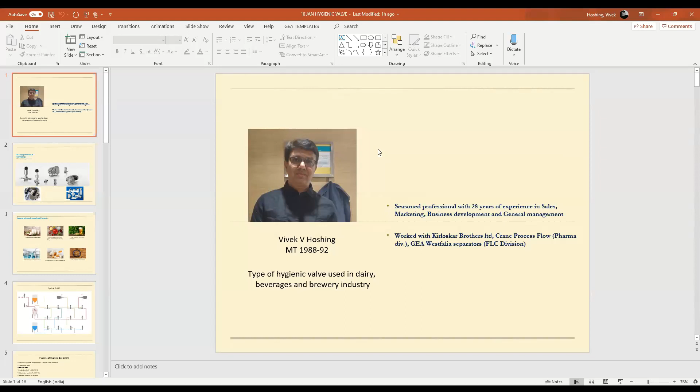This is me, Vivek Hoshing, passed out in 1992 from MIT, and after that worked mostly in marketing, business development, and general management. Worked with different companies like Kirloskar Brothers Limited for centrifugal pumps, Crane Process Flow Pharma division for their diaphragm valves as a business development manager, and now working in GEA Westfalia Separators for their FLC division. In India, I started the business for this FLC division in 2012, and since then we are doing quite good in this field.

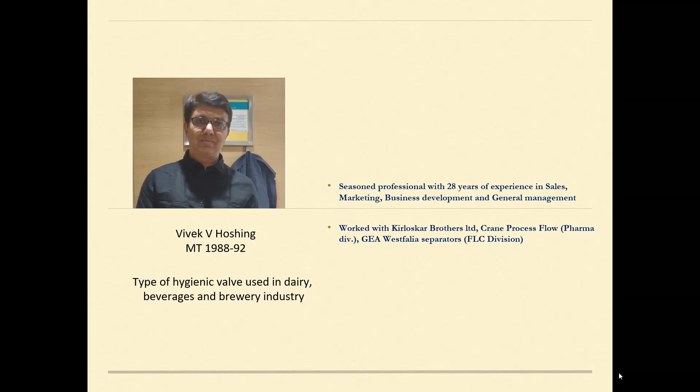So generally there are three things: one is valves, cleaners and pumps, then you have pipes, and then you have different fittings, which make up the whole system to facilitate the process.

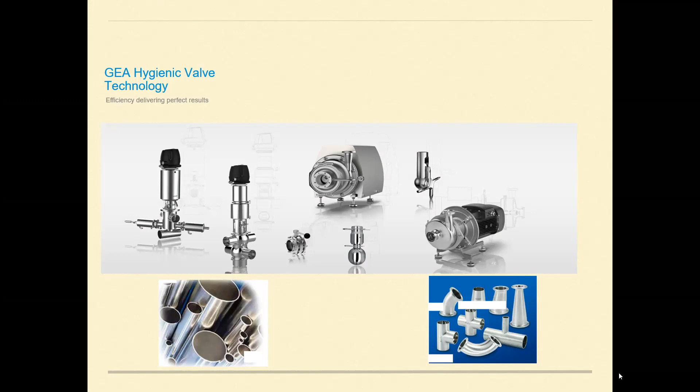Our hygienic valve technology finds its use in dairy for milk, yogurt, cheese, milk and milk products, food like sauces and pastes, baby foods, powders, and the best of all, our valves and other equipment are used in production of beer also, which I like the most. And then biotechnology, pharmaceuticals, home care and personal care products like shampoo, lotions, toothpaste, and production of animal foods.

Here the thing is that we require a process where cleanliness is very important - when you finish one batch of production and start another batch, before that the entire process pipeline should be very clean.

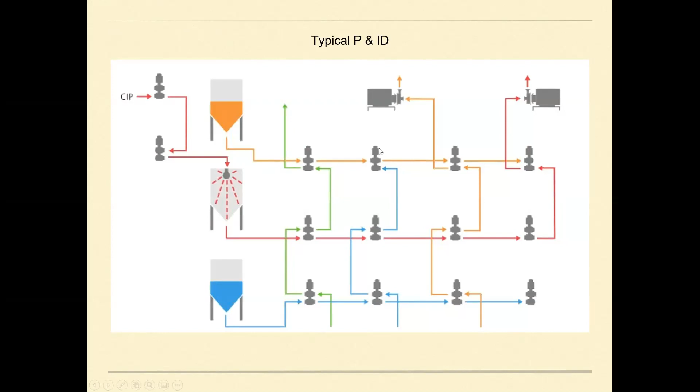This is the general P&ID where the actual work starts at the engineering centers. They make a P&ID for what all products are going to be made, and based on this, we come at the place where we select the valves and tell them which valve is going to work at what place.

The very basic requirement of hygienic equipment, whether it is valves, pumps, or fittings, is European Hygienic Engineering & Design Group approval, which is EHEDG approval. This tells that your equipment should be as easy to clean as a piece of pipe. They have their own tests that they carry out in your facilities, and then they give you the approval for EHEDG. So they generally conduct EHEDG tests.

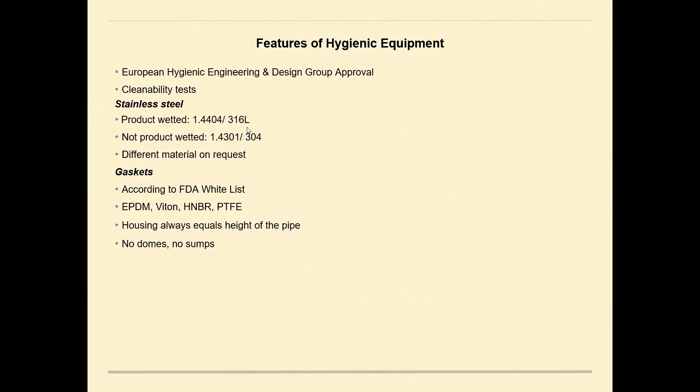So what happens is that the customer sources his equipment - pumps from company A, valves from company B, pipes from company C, and fittings from company D. So he has to specify which dimensional standard he wants to refer to and use in his plant, so that every component coming from different sources matches with each other, and there is no problem to weld or join them together.

90% of Indians go for 3A inch size or BS 4825, whereas in European countries they go for DIN 11850. I have not seen any case of IPS as of now.

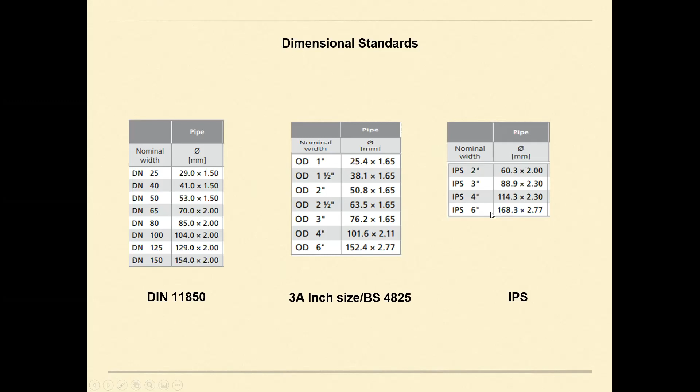So we have different types of valves. This is single seat valves, which are basically for isolation purpose. Then we have mix proof valves, which facilitate the handling of more than one product simultaneously. And these are tank bottom valves - in the tank these are flush mounted, so there is no stagnancy in the pipeline.

So these black things are control modules, which send the signal and operate the valve. This control module has got proximity switches, and it has got solenoid valves, which operate the valve.

So these are actuators - air and spring actuators. Generally the valves are closed or opened with the help of spring, and if the valve is in off position, you supply air, then the valve actuates and goes to the other position - like if it is closed, then it will open. So these are air versus spring actuators.

These are lanterns. Because many times we have to clean the pipe with hot water, if hot media is there, we generally keep a distance for the actuator, so that the heat is dissipated before it reaches the actuators, for their longer life.

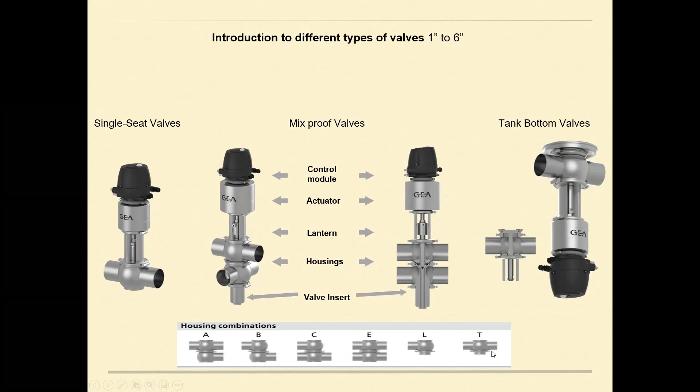Then we have housings, and these are valve inserts - so when any leakage is there, it comes down from here. Based on the customer's requirement of his routing, there are so many different types of housings available, like A, B, C, E that you are seeing. So based on the customer's process and instrumentation diagram, we select these valves.

So this is how they look internally. You can see generally you will find the valves, they are generally isolating the lines in line, but here the isolation is being done in steps. Let's say there is a product flowing in the lower one, and it keeps going. When the product is required to be sent to the upper line also, the valve is actuated, and all the 4 ports are connected. So this is just an example of 2 different types of bodies.

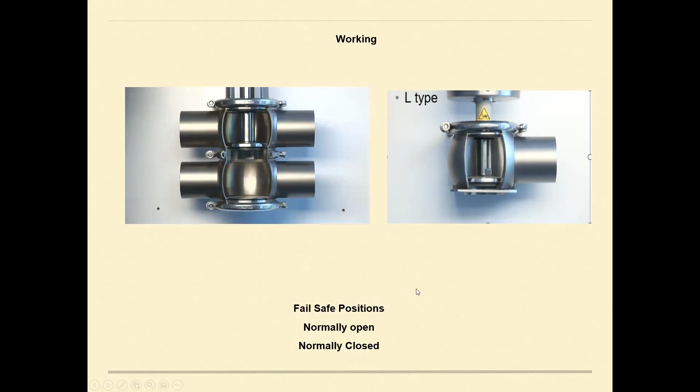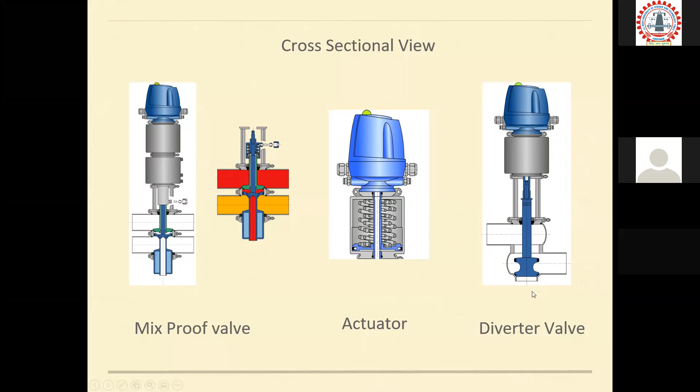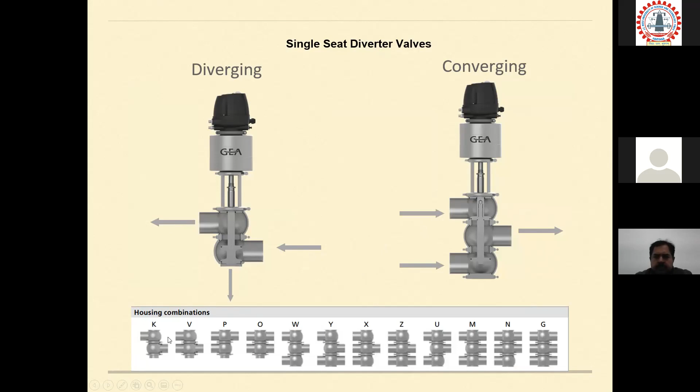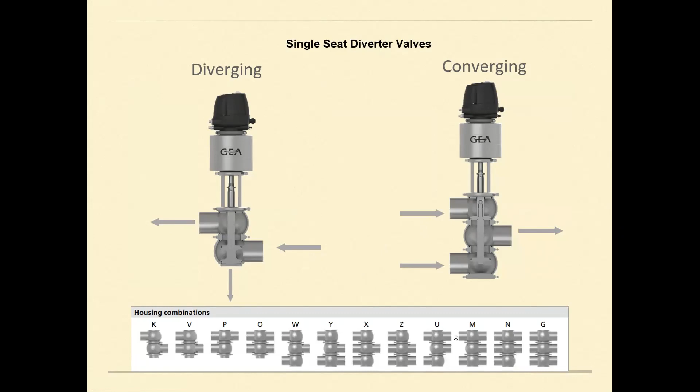Let me see if this is working. Can you see? No video is coming? Okay, now? Yes, now it is okay.

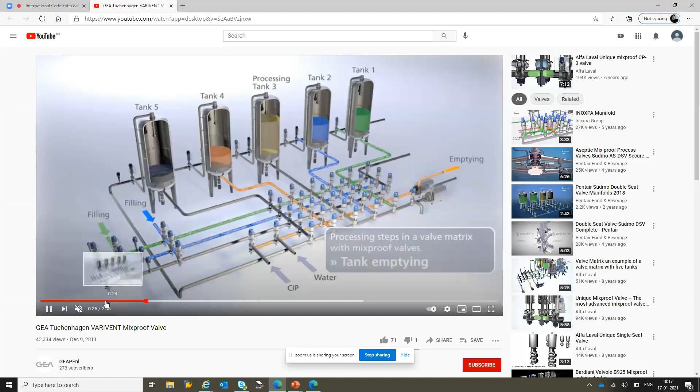So you can see that there are, this is how we call this a valve matrix. Different types of valves are put there. On the tank, one tank, there is a cleaning going on.

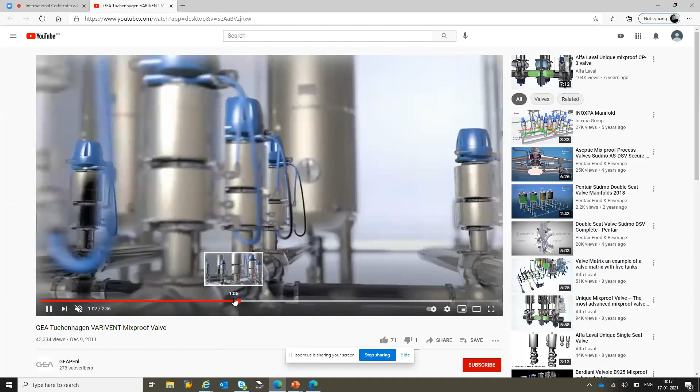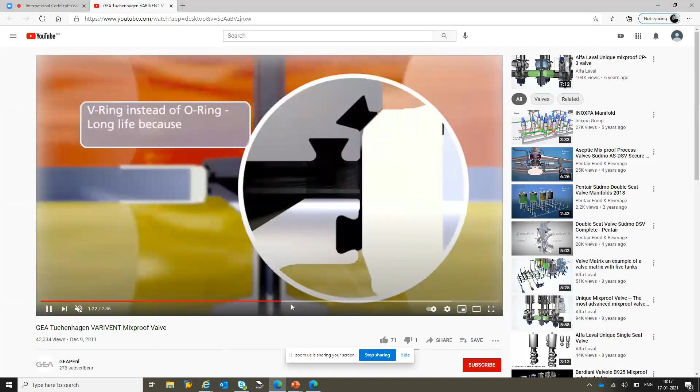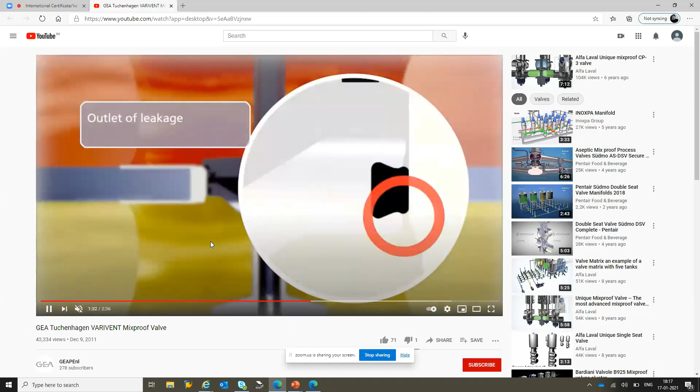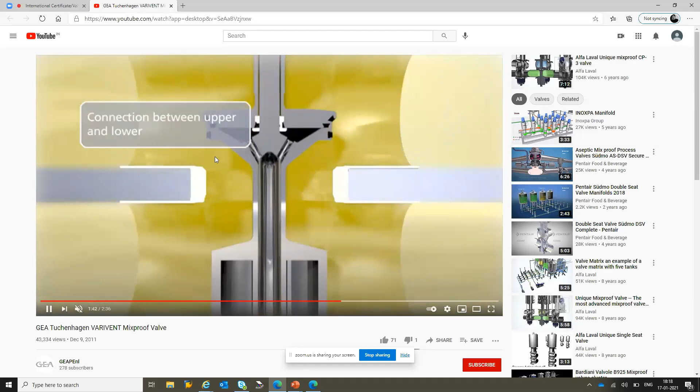I'll just fast forward it. So this is the mix-proof valve which we were talking about 2 minutes back, and two different types of media liquid products are going. If at all some seal gets leaked at one place, it should not mix with the other one. Otherwise the entire batch will be rejected, contaminated. So this is how it happens. And if you open the valve, the total 4 compartments get connected. Yes, so this is how it is.

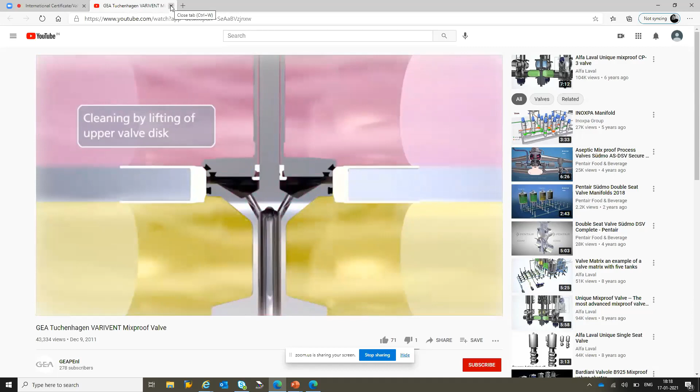So probably we'll go to the next slide. Okay. Can you see the slide? Yes, okay. So these were about the valves.

Now in any process you require to have some measuring instruments like pressure gauge, temperature transmitter. And the idea is that you have to put it in the line in such a way that the entire line has to be cleaned. There should be no trace of the old product which can lead to contamination.

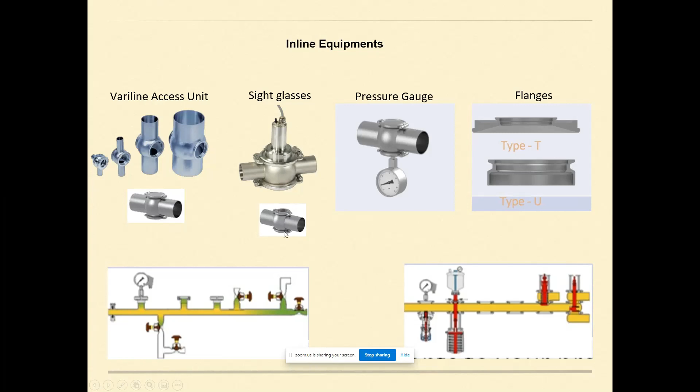So after this, the cleaning has to be done for the equipment. There are tanks; any dairy or anything is full of tanks. So when we clean anything, we need time, we need temperature of the cleaning solution, whether it is chemical or mechanical action, like we have to mechanically scrape it or something. So the idea is we have to use less time.

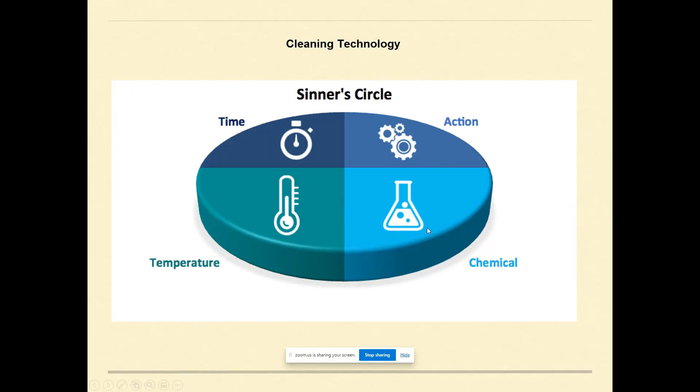If we provide more action, the time needed will be less, temperature required will be less, and we will have effective cleaning with less chemicals. So we provide 3 types of cleaners: rotating cleaners, orbital jet cleaners, and stationary cleaners, depending on the product which we have to clean. If it is simple milk, normally a stationary cleaner will help. But if it is a big tank like 10 meters or something, we may need a rotating cleaner or jet cleaner.

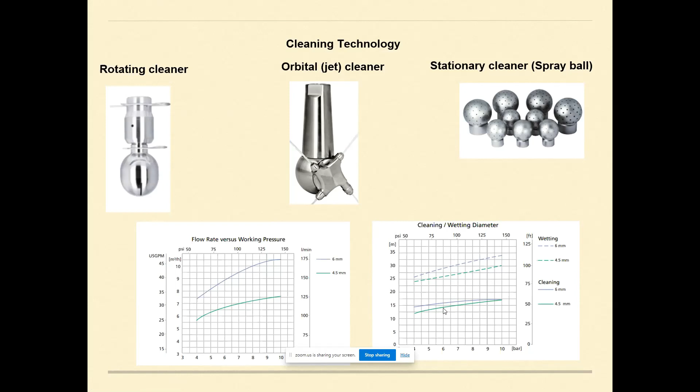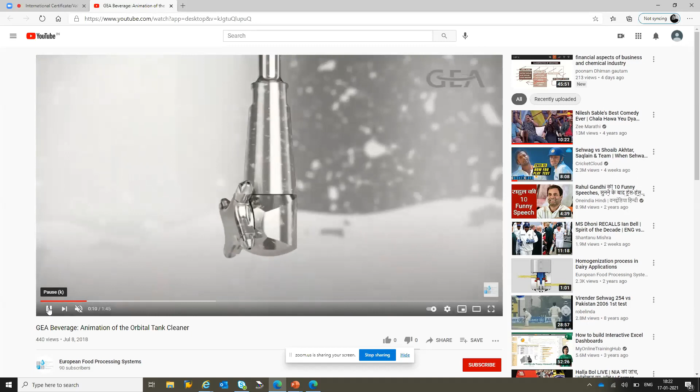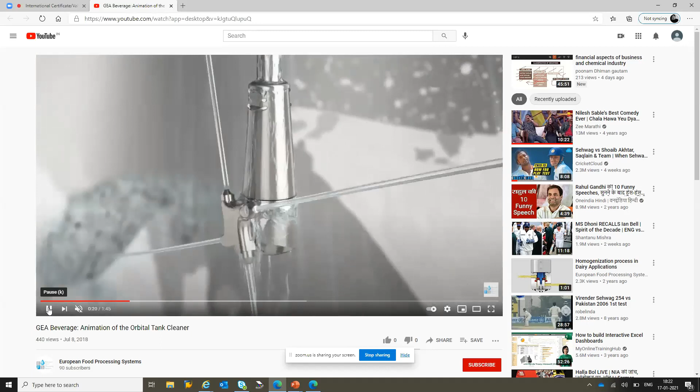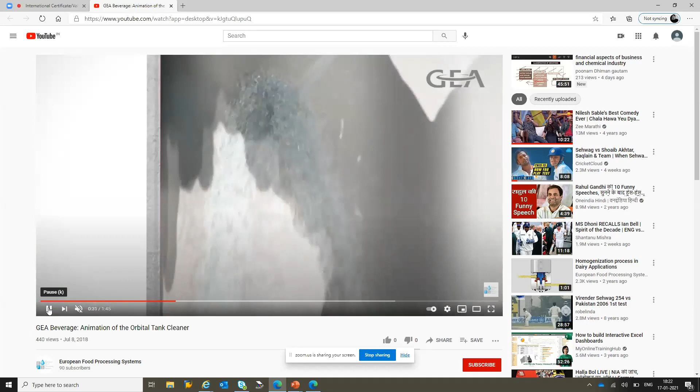So this is a typical silo, and you have a cleaner installed inside. You just have to give water at specified pressure, and then the jet starts rotating both on horizontal and vertical axis and cleans the entire tank in entirety. So generally first they will pass some weak acid and then rinsing liquid like water, and it is able to withstand that. So this is how.

Vivek, can I ask a question right here? Is there any connectivity with the viscosity of the fluid which has already been passed for cleaning? Because there could be different fluids which are passing.

Yeah, I'll give you an example. The easiest liquid could be milk, raw milk, and a very tough liquid could be toothpaste. So based on that, sometimes even the diameter of every tank differs - generally for paste it will not be 10 meters, it will be generally 1 meter or 1.5 meters. But still we have to use the orbital cleaner, which is a jet cleaner. So based on the application dimension, we have to choose the optimum solution, sir.

Okay. So you take the design consideration based on the viscosity of the fluid which is getting passed through the tanks? Yes, sir. And generally we have experience for certain cases, so based on that also. But yes, of course, both things have to be taken into consideration: the tank dimension and what is the product there.

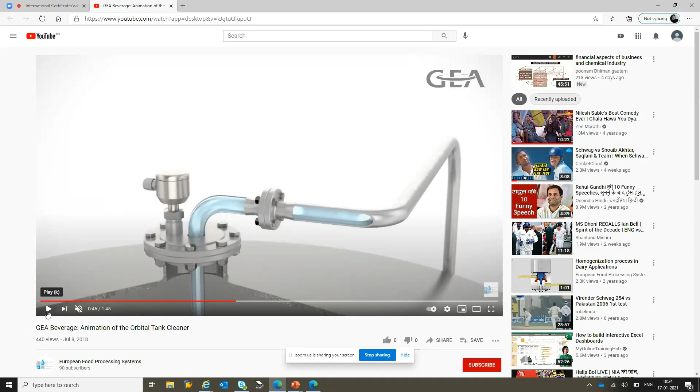Vivek, it's about cleaning of the tank - how do you clean the pipes? In the pipes, it is generally by flowing different kinds of liquids. First you have to pass mild acid, then water, and then you take a swab at the end of the tubes - generally that is called CIP, clean in place. So whatever CIP liquids you pass through the pipeline, it cleans the intermediate equipment also. So generally it is by rinsing.

So do you have a methodology to say what cleanliness levels have been achieved? Some test which can tell that you've reached so much ppm levels of cleanliness, now you can change over to another product? Generally, sir, they will take a swab, and if they don't find any product particle there, they approve the changeover then, yes sir.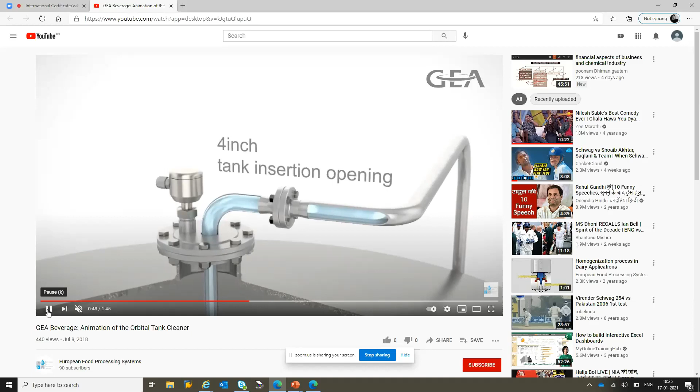So this is how it is, and then probably because the tank is closed, right? There are chances that we have given it pressure from the inlet, water from the inlet, and whether it is rotating or not rotating, we never know. So there is a sensor - you can see this sensor is there. It has to be hit by the water jet after a certain point of time, and it will keep giving signals to the control unit that yes, it is working.

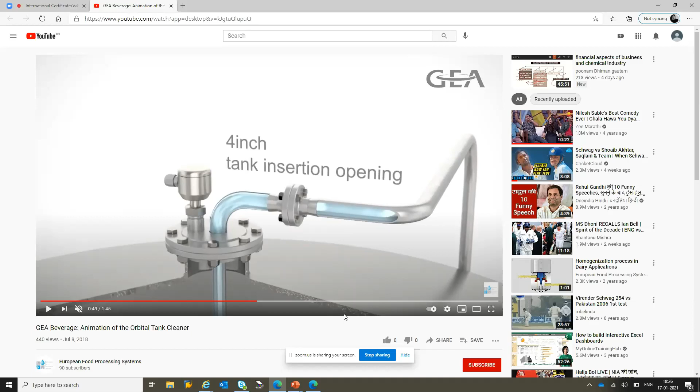And what is the maximum pressure level you go to? Generally we go up to 6 bar, but it is available up to 8 bar, 8 to 10 bar also. But generally we have seen that for toothpaste also, 6 bar is okay.

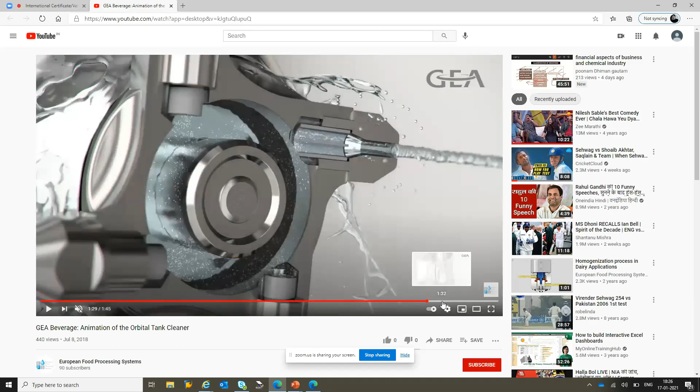So this is all internal - you get all spare parts. So if something goes wrong inside, you don't need to change the entire setup that way. So what is the material you use in these? Sir, this is SS316L again.

Okay, what is the shelf life of this equipment, Vivek? Generally, how many years have I seen? Generally, with the change of some elastomers, it goes on for 5 years, 6 years, like that. The first one which I sold - I mean, not good for business, but it goes on maximum.

For 6 years, 7 years, unless it is really handled in some different way. Like some people may try to rotate with its nozzles, so that way.

And so what about the competition, like if you are getting all the material from imports, is there any alternate other than you, sir? Yeah, local people are there. What happens is, you see, this is a rotating equipment, right? So our local competitors are using ball bearings in that. So over a period of time, like 6 months, 7 months, the ball bearings are getting rusted, and it's malfunctioning.

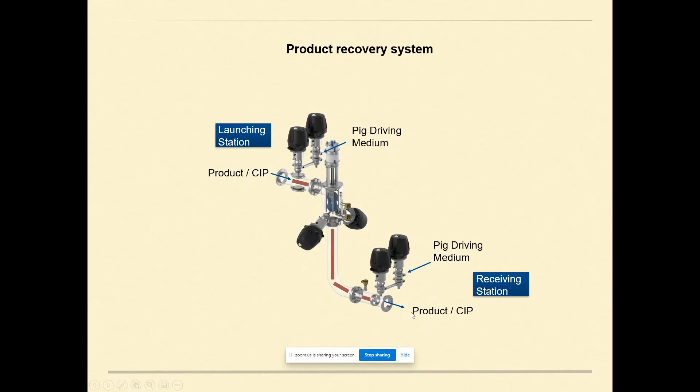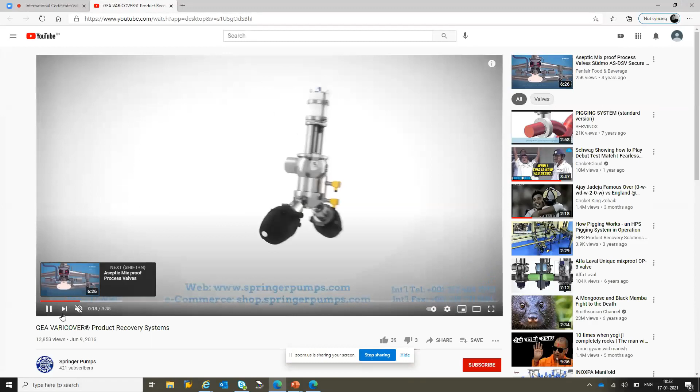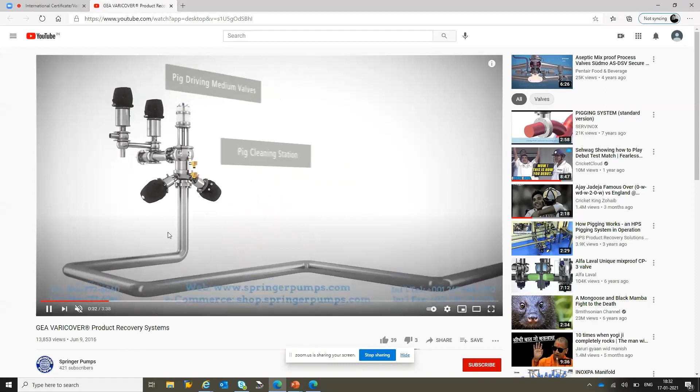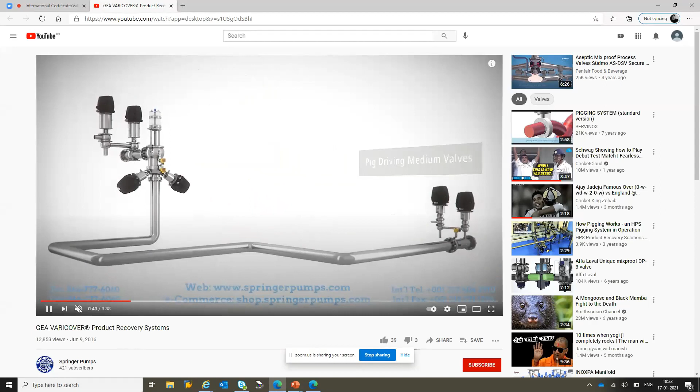You can see that? Yes, we can see. Okay, so this is the pig station. Then these are the pig driving valves. This is the production line, and this is at the end, the catching pipe, and you can see there are some proximity switches which detect the position of the pig.

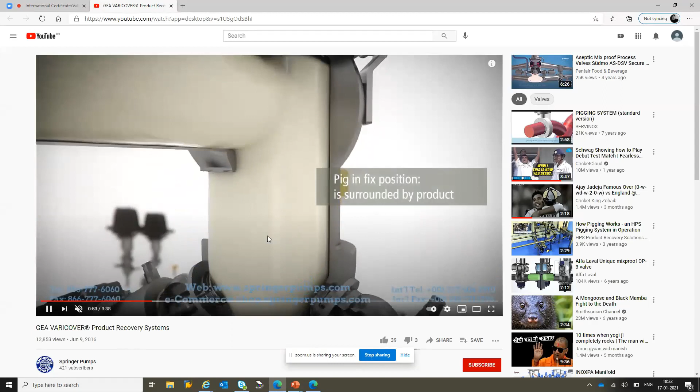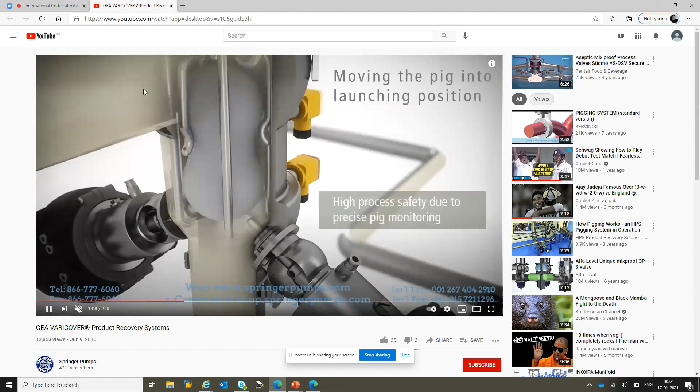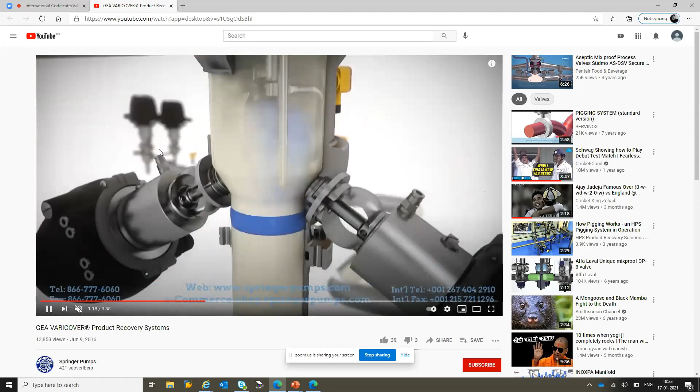Then this is your production going on. Let us say it can be shampoo or anything. So it passes through the pig also. The pig is in the system itself, inside, so you don't have to do it again and again. Once the production is finished, the pig is pushed into position, and then the pig is pushed with the help of air, and it can go through the bends and all those things, and then it rests here.

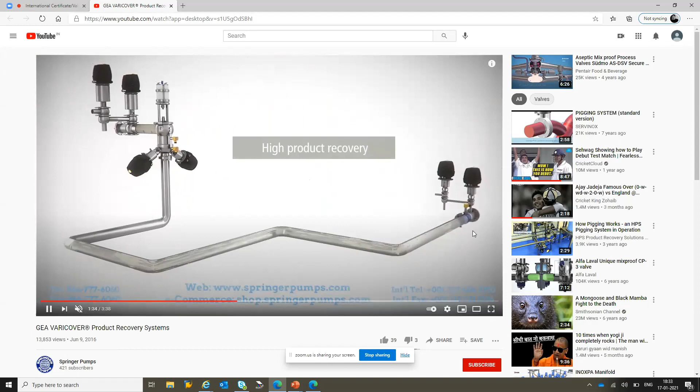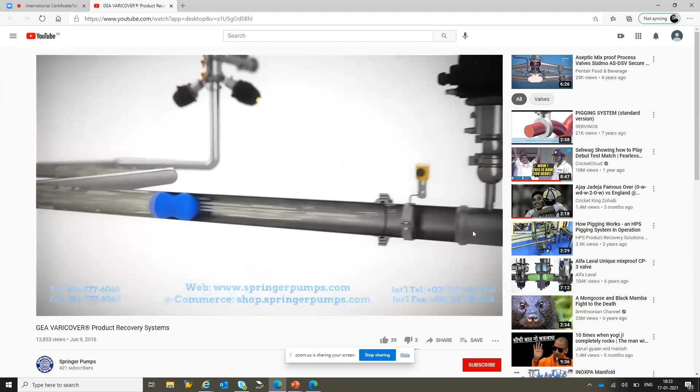So your product is recovered, and we are getting most of our orders from Hindustan Unilever world over, and this is a very effective system. And then you can send the pig back to the original position. How do you send it back? Through suction? No, not suction. There is another set of two valves which supply either water or air to send it back.

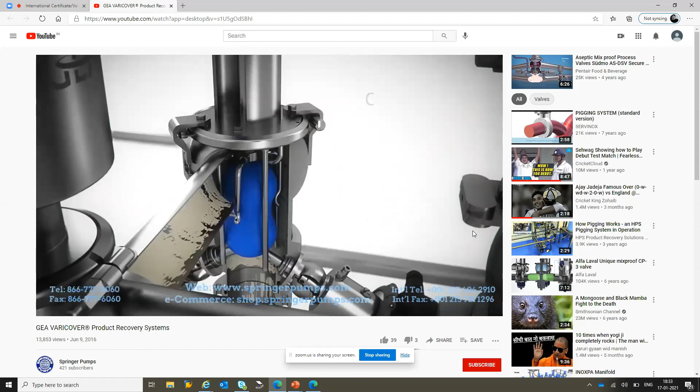And somebody asked the question, how do you rinse the pipe? So this is how: first they send some weak acid or something like that, and then it is cleaning the pipe and the intermediate equipments there.

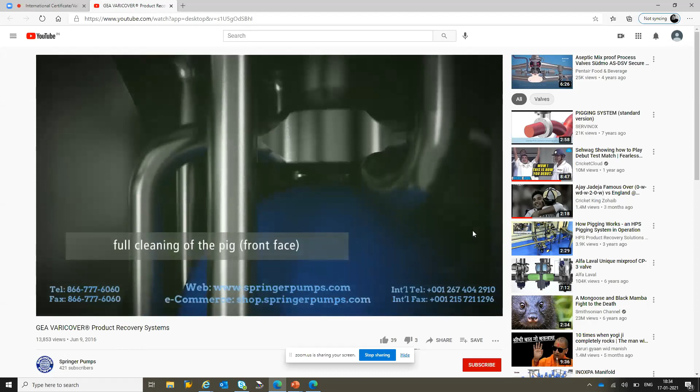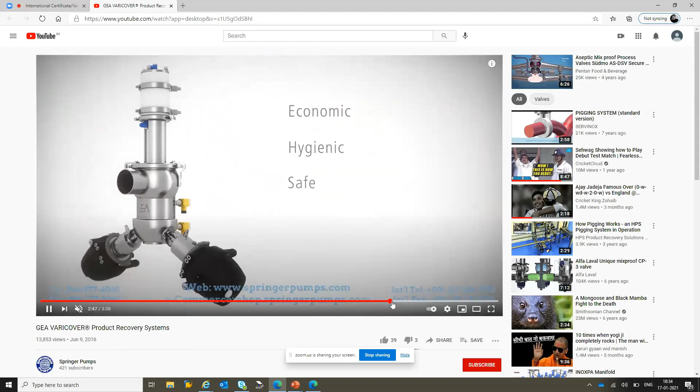So this is how they clean the pig and the pipeline. Is the cleaning of either the tank or the pipeline done during the changeover of the product, or even during the changeover of the water also?

Yeah. So this was it. Very short presentation, but these are all the valves and other products which we sell. And if any more questions are there, then please.